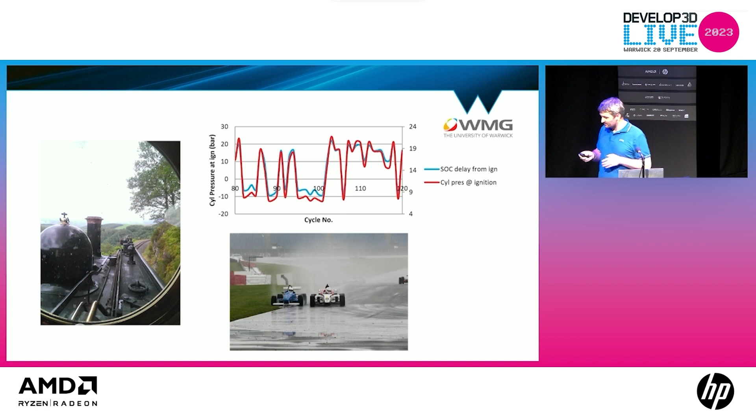I went to university because he pushed me. I found new limits - I enjoy finding patterns in systems, so I did an internal combustion project, which is why I love that little data set up the top. It was a big thing for me. I found a relationship between harmful emissions and the start of combustion, and I stuck around at the university and did a motorsport degree and really enjoyed that, because it bugged me when they were blaming an old car, and considering that I'm older than the old car that they were struggling with, I decided to rebuild my own, and we went out for like 2 years and never had a failure because I'm still going and I'm older than that car. So that brought me to here.

I had a friend call me up one day about a PhD opportunity, which brought me to WMG. Now, this is just a brief overview because I appreciate some of you might know the technology, some of you I know work with me, and some of you probably might not know.

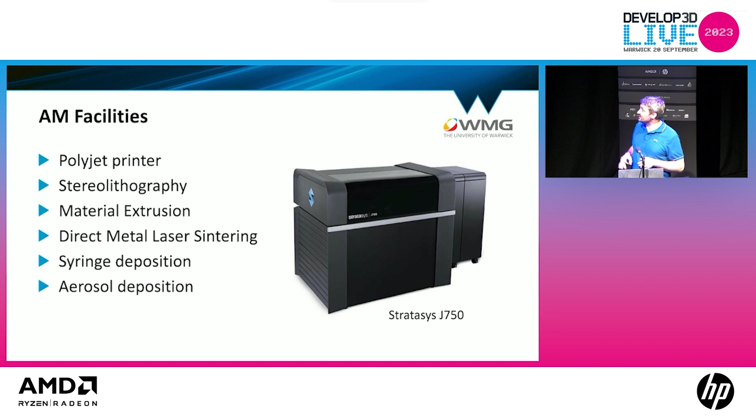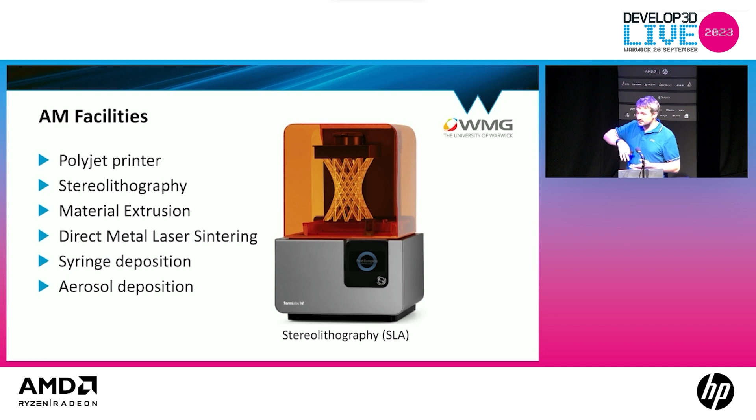This is a polyjet printer - your standard inkjet printer like you would have at home for your photographs, except it uses a plastic and UV cures it layer upon layer. It's a nice bit of kit to work with. This is your standard stereolithography - it's a resin vat with a laser that shines a light and builds the print. It's kind of an upside down printer because it starts and pulls up rather than prints onto something. Material extrusion - most of you know this one. COVID definitely brought this to the front, and since COVID, as an observation, there's a lot more people embracing technology because they realized they couldn't supply parts.

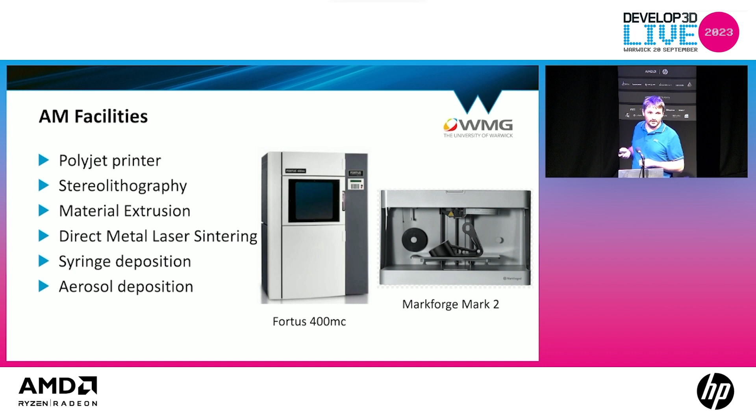One thing COVID pointed out was that anybody with a living room and a printer could print something to help another industry. These printers were going non-stop during COVID, whether in schools, universities, industry, or in your living room. So these have got a lot to take responsibility for, in standing up for what we needed at the time, as well as representing additive manufacturing.

Direct metal laser sintering uses metal powders, which are very explosive. There's a load of high hazard risks with it, but it's amazing technology. Aerospace really loves this. You can print lightweight parts with similar properties to your subtractive manufacturing techniques, and it can save a ton of weight, which is why they love it.

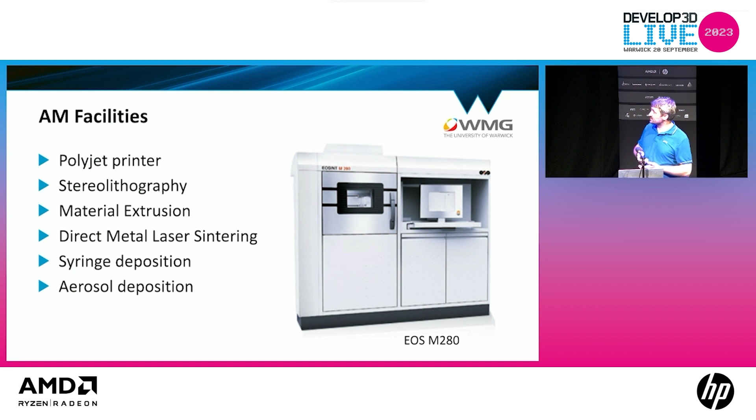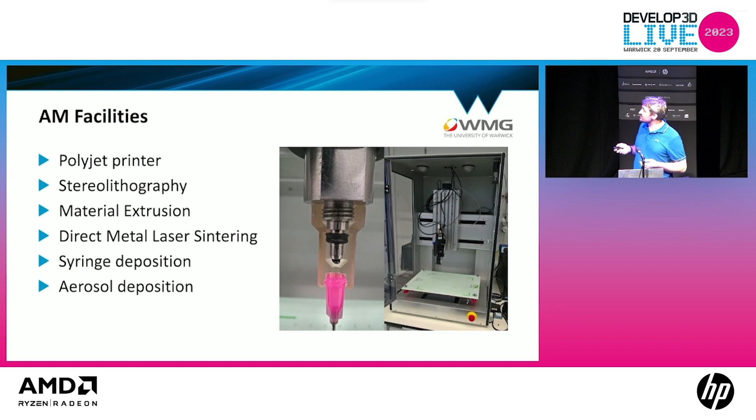They've pushed this technology into material extrusion, though it's still in its infancy. Syringe deposition, ironically, is the older machine now—we've got a nice Linkster machine. But syringe deposition is great for ceramics and other materials, anything like lithium-ion batteries. There's quite a wide variety of materials, so we've covered most of them, as well as aerosol deposition.

They're all about making components from raw materials. Materials is one of the biggest things with these technologies.

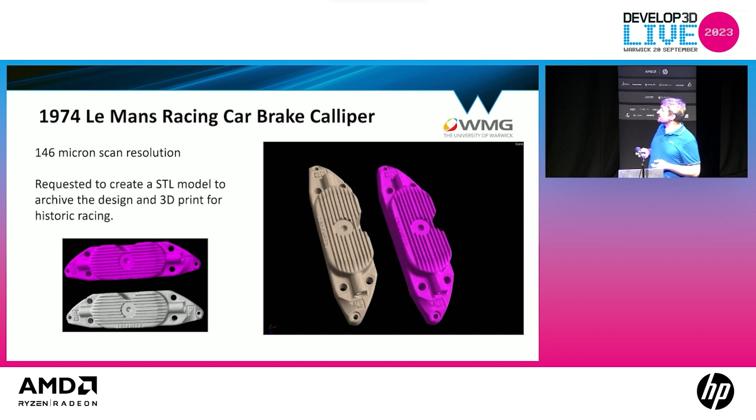Additive manufacturing obviously starts off somewhere—for most of us, it's reverse engineering. We regularly get companies coming in wanting a particular part or component. This particular part is nice because somebody had a 1974 Le Mans racing car and wanted that brake caliper replaced. It's a classic component, no longer off the shelf—probably never was off the shelf when it was built—and they need that component restored for history's sake.

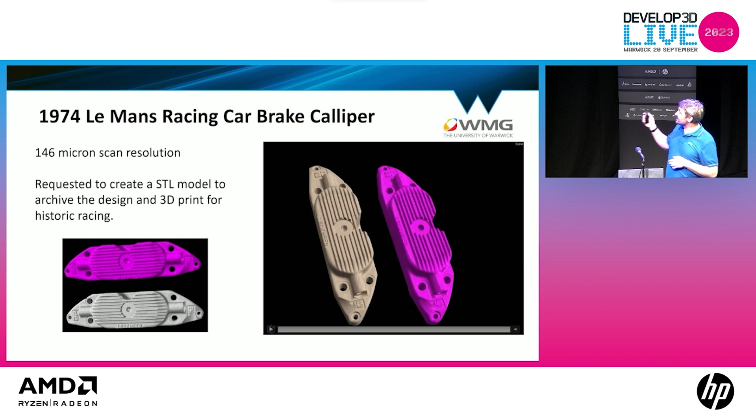Part of the additive manufacturing group is also tied with the scanning group. We have access to CT scanners, X-rays, white light interferometers—a whole range of machines to get what you need. These have internal structures, and we've got one printed on the desk as our demonstration piece.

The one we haven't got is the Dodo. Those of us a little older, myself included, remember museums where you weren't allowed to touch anything—they weren't interactive like they are now. Courtesy of the scanning group, we've actually got the Dodo skull—this isn't the actual Dodo. I would cringe holding anything like that.

I cringed when they printed the death mask of the last woman to be hanged in the Midlands—that was cringy enough just seeing it. So additive manufacturing has made this cost viable for somebody to print and hold. I can give this to a child, and whilst yes, it might break, I can replace it. I can't replace the Dodo that's sitting in a freezer.

Ironically, the scanning group determined that this didn't die of its own volition—it was actually shot in the back of the head with a lead gun, because they found lead pellets embedded in the structure. So we kind of did a bit of CSI for what would have been a couple-hundred-year-old case.

It's additive manufacturing that's making the most of this, giving it to a new generation of people to hold and see physically—because you know what it's like behind glass, you can't touch it, it's not the same. I'm a big fan of leaving the display cabinets open when people visit our labs, because we're not a museum—we're an interactive engineering facility.

And this brings me on to my next one. It's kind of an unusual combination, but it's about getting the most out of additive manufacturing.

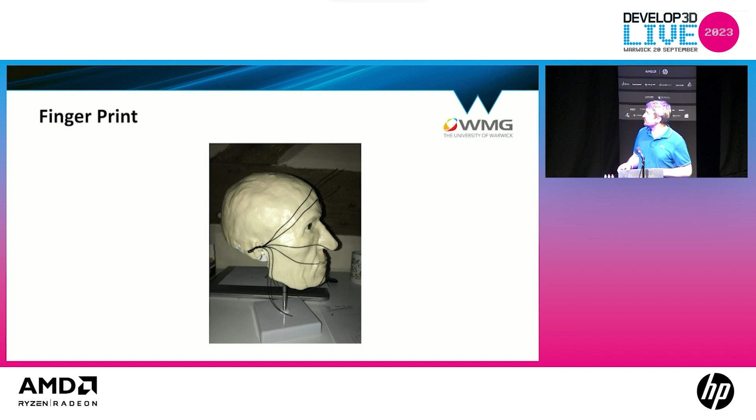So early trials are good. The students can actually interact, cut it apart. And it's nice personally knowing that the next generation of students are going to have some experience rather than be at the end of the bed and you not know it's their first time, which is a worrying thing when you learn as a researcher what does go on.

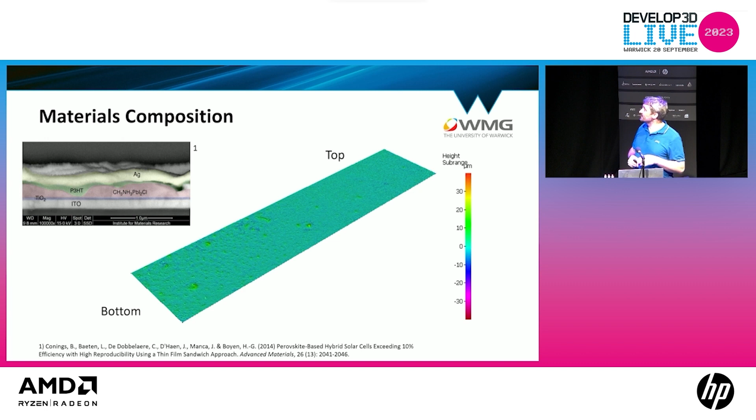Material composition. Like I said, this all boils down to materials. Additive manufacturing - I shared the 3D printers we had at the start because they haven't really changed for me in the group in the last 6-7 years I've been here. This is a 3D printed perovskite structure printed using the PolyJet printer. It's very expensive, you've got to be a chemist. There's a lot of materials formulation involved to get that. Some of us don't have access to that. I particularly am not a chemist.

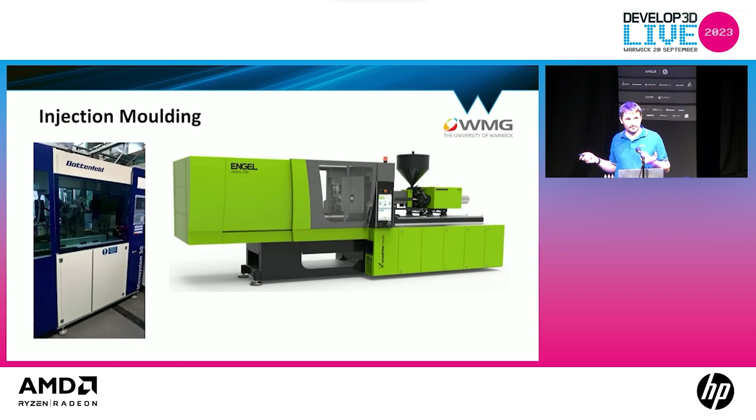However, what we do have is some injection molding facilities, and we have the additive manufacturing group. One project I had the fun of being in an early part of was injection molding these parts using soft tooling. Some of you might have already heard of it. Basically, they use the 3D printed polymers to make an injection molding tool. Normally that can cost thousands of pounds, can take weeks to manufacture. It's a high skill set that you need. Anybody with a 3D printer can make these components. Yes, you need an injection molding kit, but one of the biggest costs is the initial setup of the tooling.

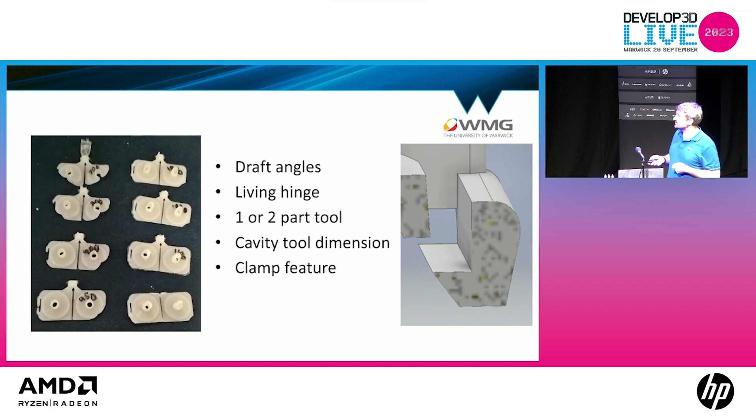So we developed some parts, and in the early phase of the research, we looked into 3D printing with the materials. Normally, these only last between 50 and a couple of hundred parts. But this is where a personal thing of myself comes in - when it comes to materials, I find a lot of people treat the plastics and the materials it's being printed as though it's metal. And I find that something I struggle with, because personally, they're two separate different things. People have tried injection molding and 3D printing gears, like a steel gear. We've spent centuries developing steels for those profiles. Plastics react differently. And that's been the same with this.

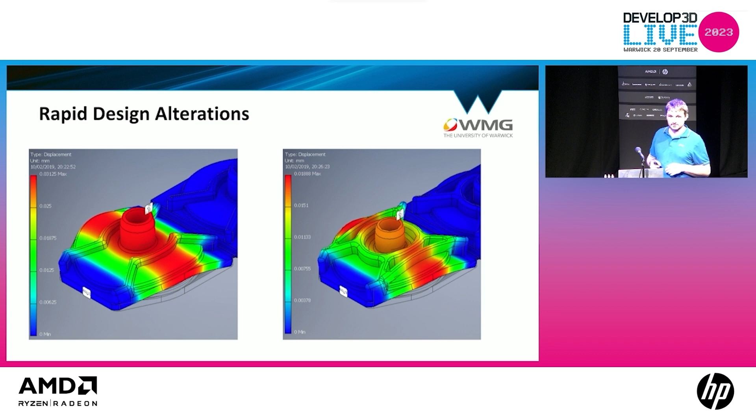Now, the best thing about 3D printing - it's really quick. Working with this project and the company involved, in one day I did 5 iterations. I was able to make 20 samples to injection mold and give them straight back to the research group that was working with this company to practice their device. In the end, it was really successful. However, I still had to make a hybrid tooling in the end, because I noticed it would fail on some of the smaller features, because I was treating it like steel. But when I replaced the parts with steel pins and made it a hybrid tool, I was able to make the 100 parts that they needed for this research project.

Now, this project actually got expanded because of the success we had. And I know, to the extent, at the moment, the limitation of the technology is anywhere up to a couple hundred parts.

I managed to make 5,000 parts one day using the tooling. I'm a big fan of breaking things, whilst my bosses have not always approved of it. If it breaks, you only see why it breaks the first time. You don't know why it's actually truly broken until you keep breaking it. Every time I broke it, I learned some more about it, and in the end I managed to push that technology until I was able to make 5,000 parts.

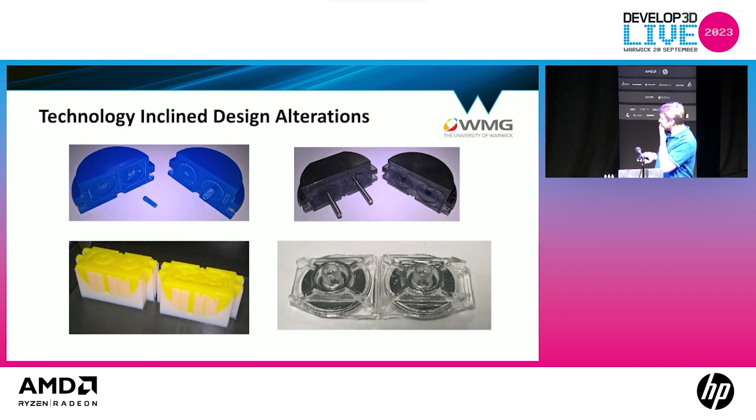The only reason I stopped at 5,000 parts is because my supervisor said, Kev, you've proved your point, you can't make any more, it's waste of material. I'd already spent a couple of days, because that little injection molding machine hadn't spent much time in the 4 years before me doing much work, and there I was knocking parts out. Somebody else has taken over that project now, but I still class this as my little baby.

So industry or research, I asked the question because it doesn't matter who you are. Some of you already have the technology, it already exists, it's just what you're using it for. I sometimes find most people still class 3D printing as trinkets, toys, little dragons, little Benchy boats, something you can put on the shelf. It's so much more than that, even just knowing the materials.

So whilst I shared with you the polyjet printer I use for injection molding, I had one company approach me, they needed a larger tool but weren't willing to pay the cost of the polyjet. So I used material extrusion, FDM printing on Onyx. Those two lumps cost me £20 to make. Within a day, I'd made 50, 100 samples for this company in HDPE that they wanted to prove a concept. Low cost, one day research, a couple of hours of printing, and some HDPE, which we know is cheap as anything in a pelletized form.

So it's not just polyjet technology that can be used, any one can be used. It's about mixing what you've got to get the most out of it, and so much more can be done, as well as the fact it's cheap. I know some of the setup costs of polyjets can be expensive, but there are a lot of companies out there who will offer their service who make those parts at a lower cost. It's still cheaper to manufacture.

We work with some injection molding companies, and they've proved the point with steel tooling. It's still cheaper for them to manufacture using additive manufacturing and then polish it, and quicker than doing it subtractively. So that's why, again, my talk today to you was: it's cheap, give it a try. If you haven't given it a try, ask somebody about it. There are plenty of companies who have additive manufacturing who are willing to share it, as well as bureaus who will work at encouraging and funding opportunities.